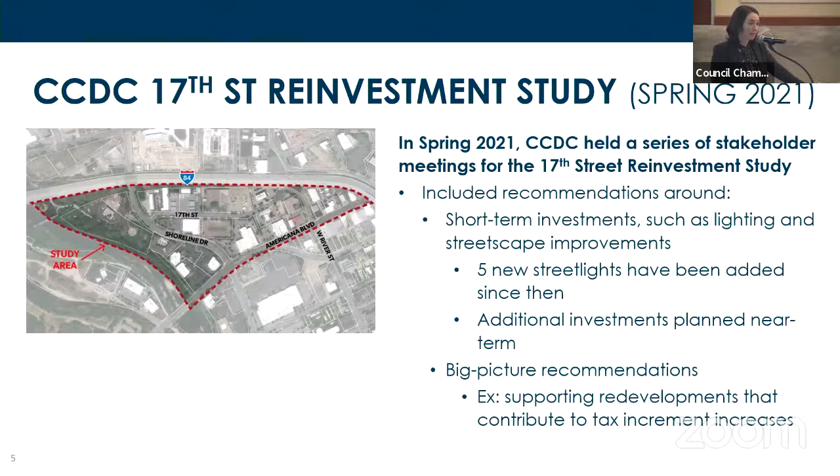There were also some big picture recommendations, for example, supporting redevelopments that contribute to tax increment increases there, given that it is now an urban renewal district. There also was a CPTED, Crime Prevention Through Environmental Design report done in 2020 by the Boise Police Department that came out with some similar recommendations.

So while we do know that change is happening in this area and in Boise as a whole, there are many things that we expect to remain the same. People experiencing homelessness will continue to access vital services on this corridor, even with the relocation of Interfaith, which is tentatively estimated for March of 2024.

Some of the agencies who are right here in this corridor are Catch, Corpus Christi, River of Life. There are healthcare providers, Terry Reilly and Access Behavioral Health. We also have the Boise Public Library, emergency services providers. All of these are located in this area and continuing to invest in service provision here.

Catch, for example, is currently undergoing a $1.3 million remodel on their building, which was funded through City of Boise CDBG funds. So while we know that this will continue to be an area where people seek and receive services,

we also know that services and facilities in this neighborhood for those experiencing homelessness are inadequate. This has negative impacts for individuals who are not being adequately served and for the surrounding neighborhood.

This is my illustrative example, because I think sometimes when we say services and facilities, that can feel vague. And what are we even talking about here?

Next up, Chief Niemeyer to talk with us about Fire Station 13, that will be located on the great piece of property on State Street that has a beautiful sign. It does have a beautiful sign, letting our neighbors know that a fire station truly is coming to this neighborhood. It is, we promise. We've got the sign to prove it. Let me see if I can work technology. If not, I might have to ask Sean to come up, and there we go. Perfect. You can tell I'm not normally the one working technology.

Okay, yes, Madam Mayor, Council, good to see you again this afternoon. Happy to talk about what we believe is a really positive project for our city and predominantly for the Northwest residents.

As I look back, it was just a little over 22 months ago that you all gave me this great opportunity to be your fire chief. And it was a conversation with the mayor, getting priorities. And one of those priorities was get service delivery to the Northwest neighborhood. And so we took that on.

Just to do a quick refresh on the background and how we got to where we are today. Chief Gervais and I started right away and we looked at the previous site located, identified for the fire station that was on Gary Lane. We quickly identified that was not the right location to provide the best coverage to the entire Northwest. So we came back, we worked with our GIS folks, our data folks.

We identified Bogart as kind of that ideal location somewhere near State Street. And it just so happened that there was land available at the corner of State and Bogart. And so we entered into discussions with that landowner. We did do the property purchase in December of 2021.

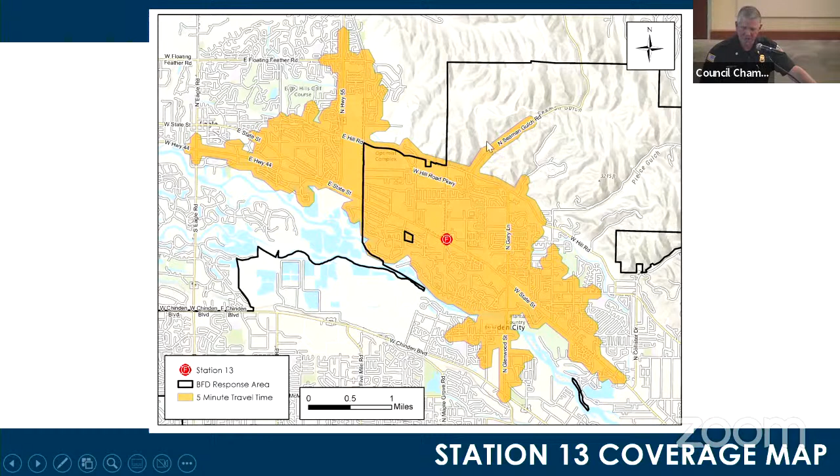As far as service coverage area, with this location we can completely cover this far northwest portion of our response area. We believe that's the best benefit to the citizens and the community at large by putting the station here. This is just a coverage map. You can see we can get up into Seaman Gulch. The only reason you see white here is there's simply no roads there. As the roadways expand out, we'll be able to cover any growth that occurs north of Hill Road.

So that's status since the land purchase, and I think this is where I'll hand it off to Sean, and he'll cover the rest, and we'll take any questions you might have at the end.

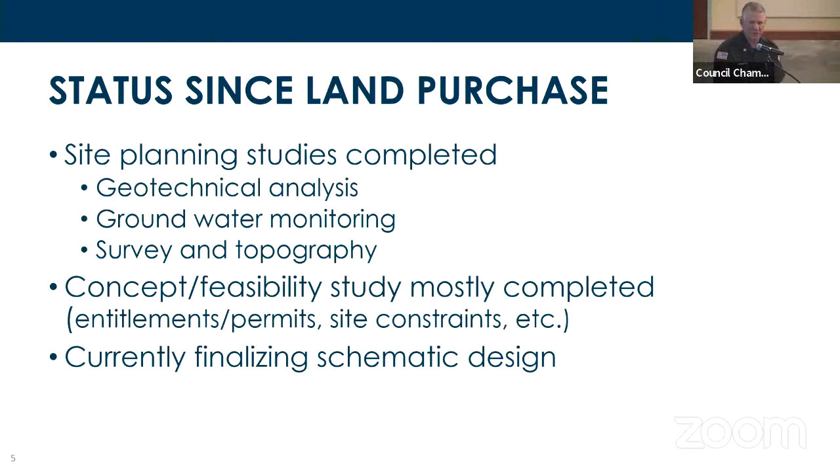Once the mayor and council members purchased the land, we started launching discovery and planning studies right away—geotech, which is the soils condition, groundwater monitoring, and surveying the site. We built a concept feasibility study looking at entitlements, permits, variances, setbacks, all the restrictions for the site. We're currently finalizing the schematic design.

The site is a little unique, and there are pretty good site constraints. We have an open canal running through the south portion of the site, ITD on one border, ACHD on another. The development to the east of us is currently in the design process, so we're trying to coordinate with them as well. We have a curb cut on North Bogart Lane, so it's a single point of site access, and we're looking for a variance because it doesn't meet setback requirements. We're proposing a new curb cut just for the fire engines onto Bogart Lane. We have really shallow groundwater, and we have some deed restrictions on the site—it's public safety with some other minor municipal functions.

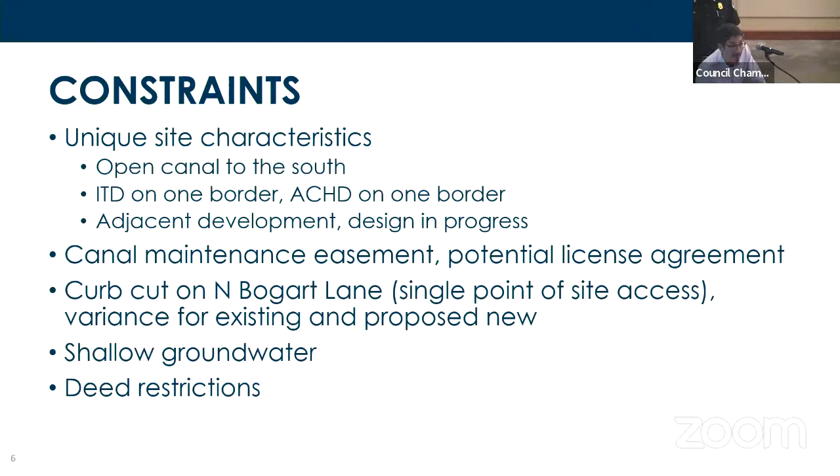From a floor plan perspective, we really focused on having fire and police work together. We have a common workout area, similar workstations next to each other, and good access for police to the kitchen and other things fire typically uses. We went out of our way to definitely make it a public safety building.

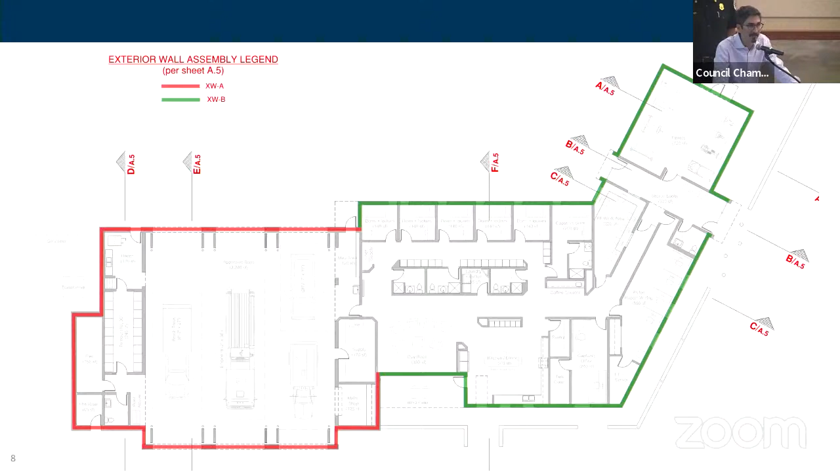So next steps, we're in the middle of cost estimating. I wouldn't say it's feasibility of the concept, it's more of, do we have the budget for this? Can we have this direction, or do we have to trim it back?

Detailed schedule, working out a schedule. The construction market still has a lot of challenges right now, so we're trying to work through that.

Proceeding with final design. So on the consent agenda, there's a contract for the final design for the project. And then additional activities we're working through, potentially some pre-procurement phases in the spring and summer. We might have to start ordering electrical equipment early, those types of things, just to meet schedule.

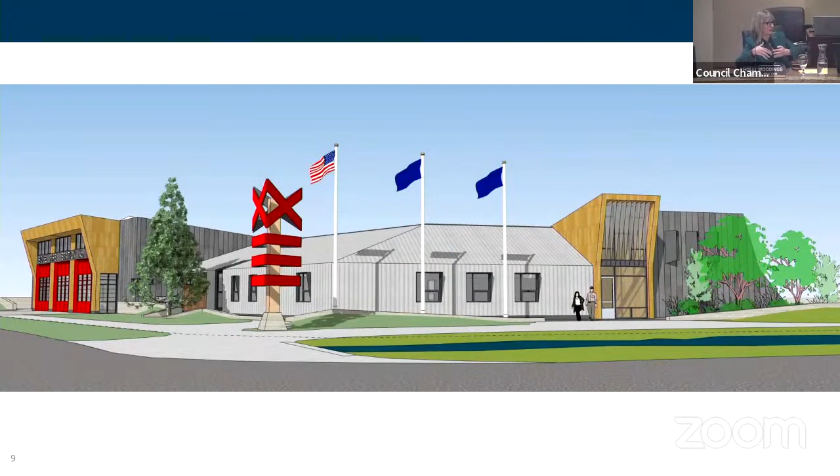It was really great to see the fire station pulled up to both streets. I initially had envisioned it for sure being pulled up to State, but it's great that it's really facing both. I'm noticing in these drawings that the canal is still there, and I know that CCDC in the State Street plan had envisioned covering the canal in a lot of places. So I'm curious what kind of conversations have happened in that direction.

Not a ton. We did talk to ITD and it's not on their master plan, at least in their 10 or 20 year plan, it's a ways out. And then we did put it on CCDC's radar with the new URD out there, but we haven't met to see where they're at. I think they're just getting that one up to speed. Okay, future conversations. Thank you, appreciate it, looks great, thanks.

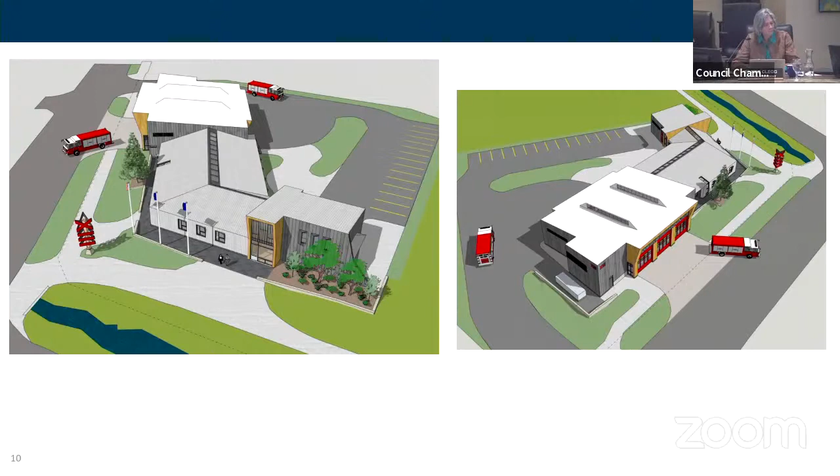Mayor, I know that the canal on the south side is a constraint. It's also a corner where ACHD or VRT is working with both ACHD and ITD on a bus facility. And right now they've sort of identified the far side of the corner, but I think it would be helpful if we at least make sure that they know they could work with us on this side if needed.

Yeah, Madam Mayor, Councilman, we did reach out to PDS. We're coordinating with their planning since they're coordinating with VRT, so they know this is on the radar. I will say the building's back far enough too, where there's enough space still available if this ever needed to be an opportunity for a stop. But yeah, they did mention the northwest corner is their focus.

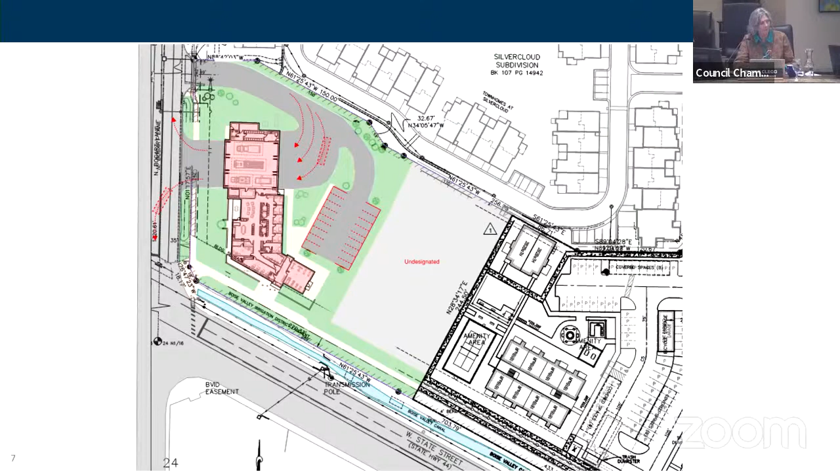Thank you. And then I know that these are preliminary. They're showing on the site, on the rendering, some trees up by the building, but no trees in the parkway between the sidewalk and the street. Just want to make sure that we're aware of the opportunity to plant big trees there as well, and the difference they could make in the heat gain and the cooling in the building.

Mayor, Councilmember, yeah, we're also looking at wayfinding because it kind of has two front doors—people are coming from the State Street side, but of course the crew's coming in from the backside, so there'll be some wayfinding and other things out there. I did have some initial conversations with the canal company. Of course they're not too fond of trees near the canal, so we'll just have to navigate within those constraints, but focus on that for sure. Thank you. Thank you.

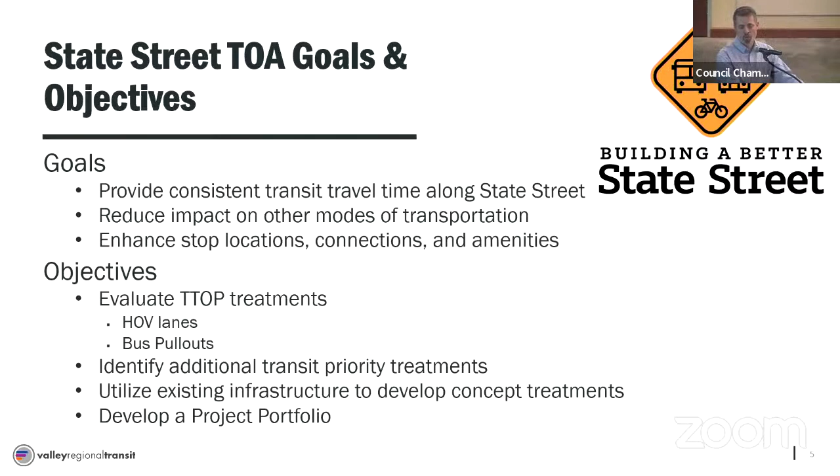Quick background on the State Street corridor: currently there's a whole bunch of different widths as you move through the corridor from downtown out to Glenwood and beyond. This is what was addressed in the State Street Transit and Traffic Operations Plan, how to standardize the corridor and make it a multimodal corridor. The T-top envisioned 3 lanes in each direction, with the outside lane being HOV lanes, on-street bike lanes and sidewalks, and a raised median. As we did the transit operational analysis, we compared 2 alternatives to that T-top vision.

The first alternative looked at 6 general purpose lanes, removing the HOV lane restrictions, but instead of having bus pullouts, we had in-lane stops on that general purpose lane. We had enhanced transit priority lanes at major intersections, which I'll show an example of in a second. We also created a separated multi-use path — instead of having both a sidewalk and an on-street bike lane, we moved the bike lane up to the curb and created a multi-use path in both directions. So that was one of the alternatives.

The second alternative was similar — 6 GP lanes, in-lane bus stops — but really focused on a targeted approach to transit priority. Where could we get the biggest bang for our buck on transit priority, as opposed to corridor-wide lane treatments? Again, a separated multi-use path, no HOV lanes, no bus pullouts.

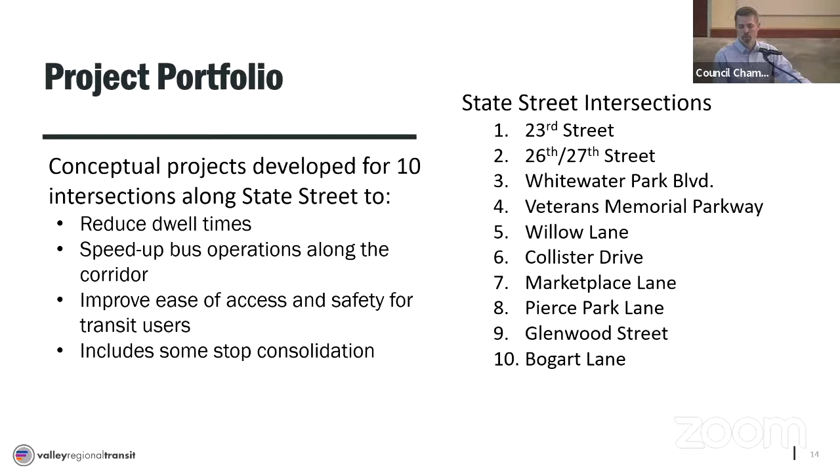So the next steps with this are that we've been working through the State Street Transit team to lead a process that would formally acknowledge the State Street Transit operational analysis findings. We're working on potentially updating what's in the T-TOP, particularly that cross section, understanding whether we're building 2 general purpose lanes with an HOV lane or 3 general purpose lanes with in-lane stops. That will be the next big ask as we move with our partners through this process, suggesting that we can get these improvements done, which will allow us to program and construct the rest of the State Street corridor as envisioned, and continue to coordinate with our partners on building out the rest of the project portfolio.

With that, I would stand for any questions. Madam Mayor, when you say consolidation of stops, are you talking about 2 stops next to each other, getting rid of one and putting them in one spot? Do you know how many we're talking about when it comes to consolidating? Are there 5 spots getting rid of, is there 10? There were 2 to 3 stops or locations where we're looking at stop consolidation.

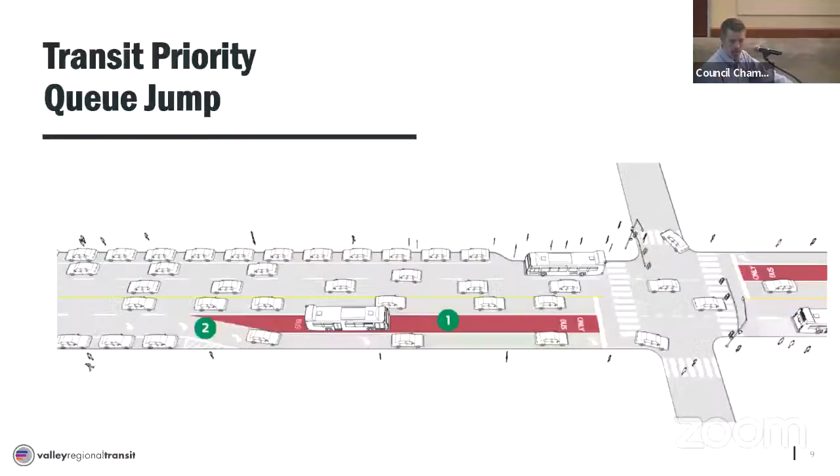Sure, Madam Mayor, Councilmember Woodings - the TTOP, which was the document adopted in 2011, was what established that original cross section. This identified a 7-lane cross section with bike lanes and a sidewalk. What we did with the TOA, the transit operational analysis, was look again at that HOV lane, the pullouts, and the function of that bike lane. That's where we made a recommendation for moving that from on-street to a multi-use path.

Okay, so the transit operational analysis we've just concluded - one of the things we will be doing is suggesting an update to this cross section that would show 3 lanes of general purpose traffic with a multi-use path rather than the bike lane on the street, so everybody's clear as to what that cross section looks like, as well as references to bus pullouts being replaced with in-lane stops.

That's great, thank you. I was very confused - I thought that we did multi-use paths now, I thought that was the best practice. So it's nice to have that history that this was 2011. We've learned a lot of stuff since 2011, and so that's being updated. Thanks.

Madam Mayor, thank you. Thanks, Stephen. It's great to see this finally done. A couple of questions on details. The first one is that as we first initially talked about this, we talked about potentially moving from an HOV lane to a business access transit lane. I'm assuming there's not as much detail in these memos as I wish there was, but I'm assuming what was found is...

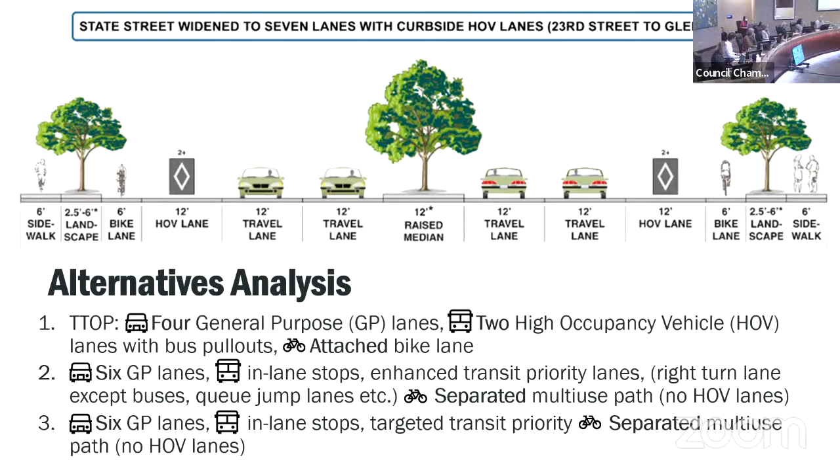I want to thank you both for coming, and just say that the opportunity the RAISE grant provides us to move ahead on this corridor is really quite remarkable. I'm really excited and appreciate the work and partnership that VRT, the Transportation Department, our city staff, and so many others did to make that a reality. That makes possible advancing some of these investments along State Street that we wouldn't have otherwise been able to do. Thanks for coming to talk about the more technical nature of it, and I really look forward to the impact this will have on this corridor as we start to make the investments that actually change the way things look and the experience, and most importantly, the experience our residents have as they move back and forth.

Madam Mayor, before I make the motion on the executive session, I'd like to also note that, 20 some years on, it's pretty exciting to finally be at a point where we're going to build the real transit infrastructure on State Street and not just widen the road. Thank you to everyone who worked on figuring out this new way of operating on the road so that it can work the best possible for transit. Thanks.